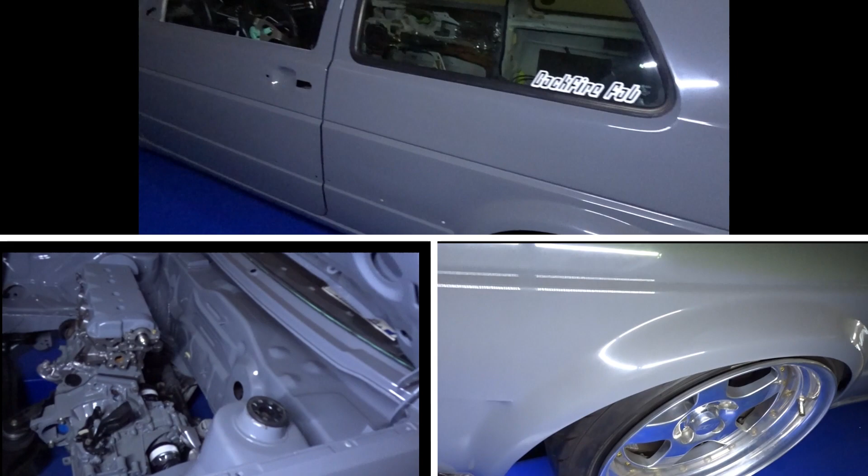Sorry for jumping into a new car, but this was my original mint green Performance VW magazine car. Now it's painted Nardo gray and is going to have an ABF 2-liter 16 valve with twin G60 superchargers.

Now back to the unboxing. Let's see what's inside this box that they sent - Elevel Plus height sensors. So this is what they give you for height sensors. They actually come in a pretty nice box.

So these are going to be the last thing that I put on. Once I get the car all running, I'll put the car on a lift and figure out how I'm going to run these. But they're actually super nice.

So this is the controller. Feel this thing, it's pretty beefy, all CNC'd. So this is the new solenoid they make, the VU4, all CNC'd, and they bolted it right onto the back of the case.

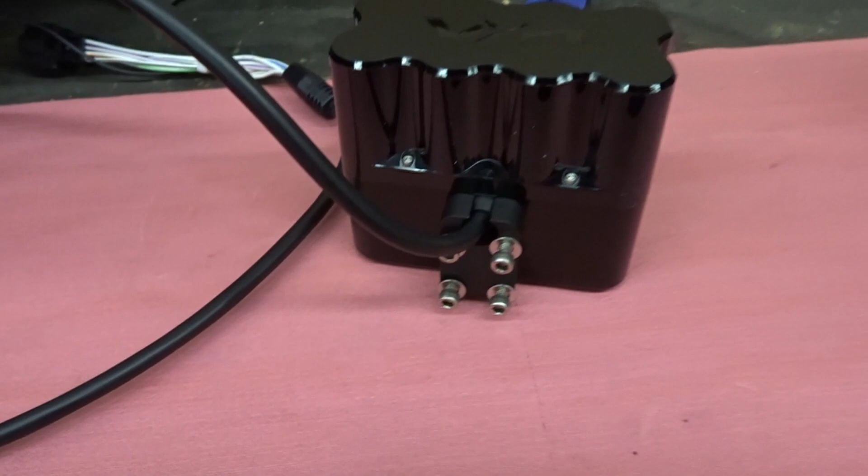So this is their new Elevel Plus with the small box. Let's take this out and take a look at it. And that's it, that's the whole controller - all waterproof, everything's built in. Solid state, done.

Wiring harness, and a pressure sensor.

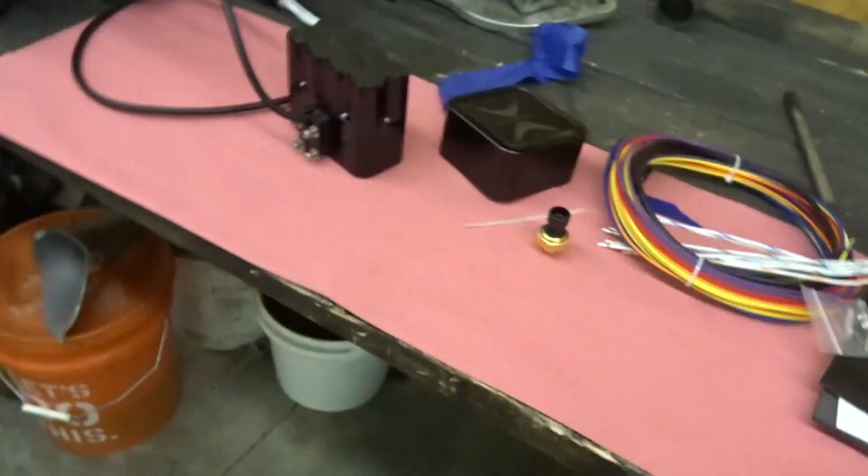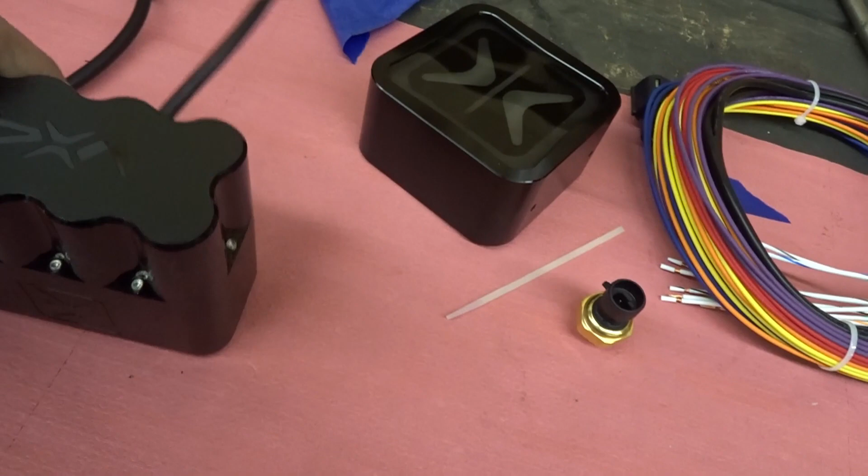So this is everything laid out. You got the height sensors, pressure sensor, your in-car keypad. I can also do it Bluetooth through my phone or an iPad. There's a control box, all the hookups, the manifold hookups, and these are the adjustments for speed of the air.

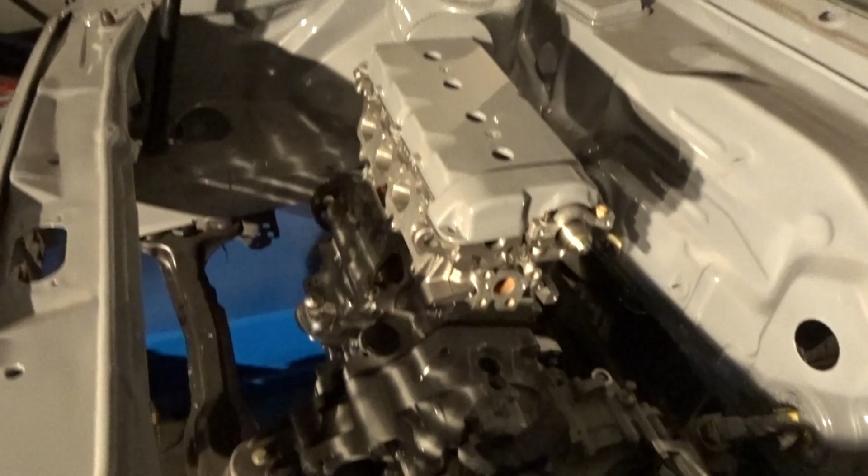So this is my car. I've been waiting to finish this thing until I got that air system because I didn't want to put it all back together and have to deal with taking it apart just for that. So I've been putting it off, and I finally got it - it's finally time to put this thing together.

This is the supercharger bracket I made that fits 2 superchargers on it. That round hump is where the alternator goes. This should be a fun project to get finished.

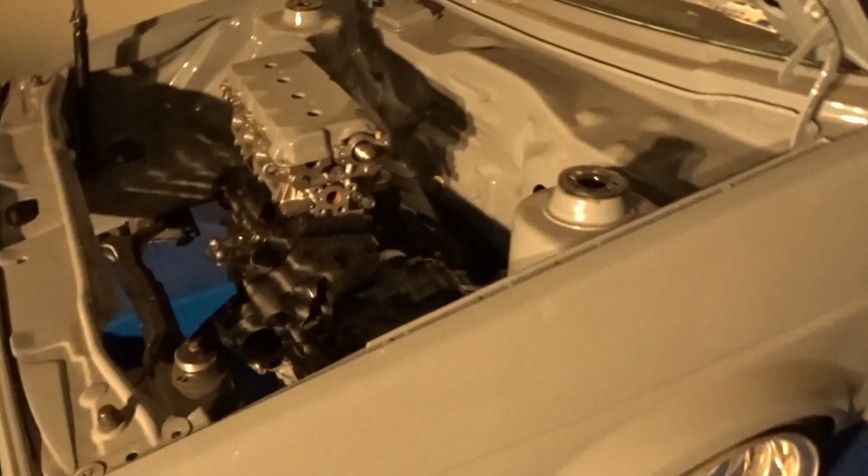The first thing we got to do is clear out the inside so we can put this thing together. I'm going to set this up, do a little time lapse, and get this thing cleared out. That is my old air ride stuff - when I get it out, I'll show you what it was.

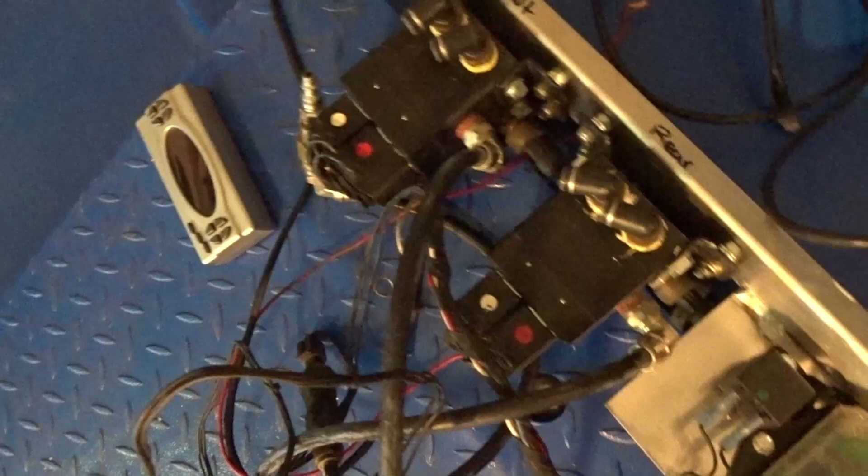Got our old management out. It's a V1 system. I had a V2 solenoid in here, but I went through 2 of them and had enough with it, so I switched to these old school valves, which I can't wait to get rid of.

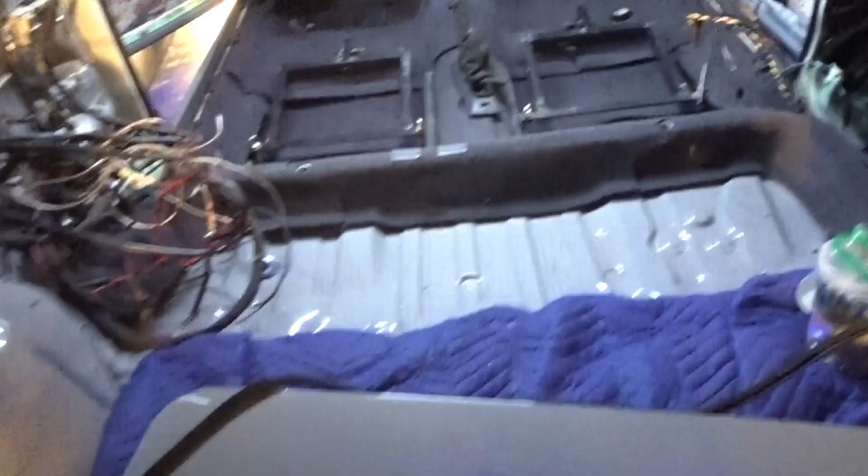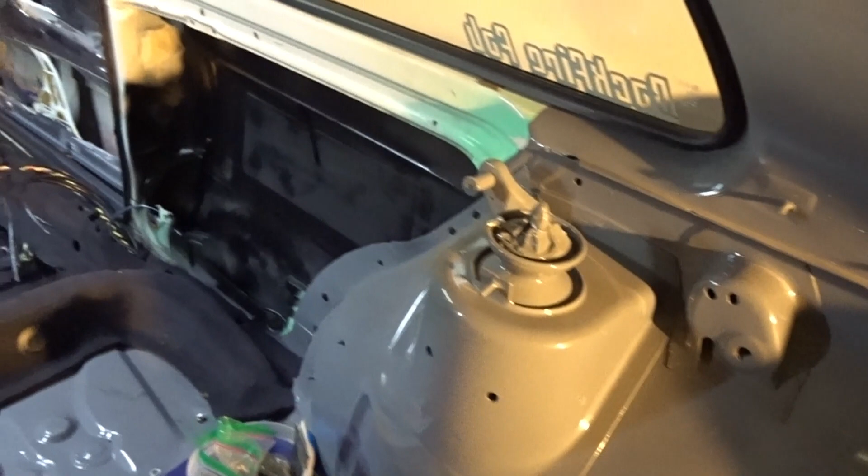So we got everything pretty much cleaned out that we need. This is the wiring to the rear that I have to take apart, clean up, and run to the back lights. We got the spot where the air ride is going to be mounted, and I'm going to start doing that - getting everything set up before I make a plate for it.

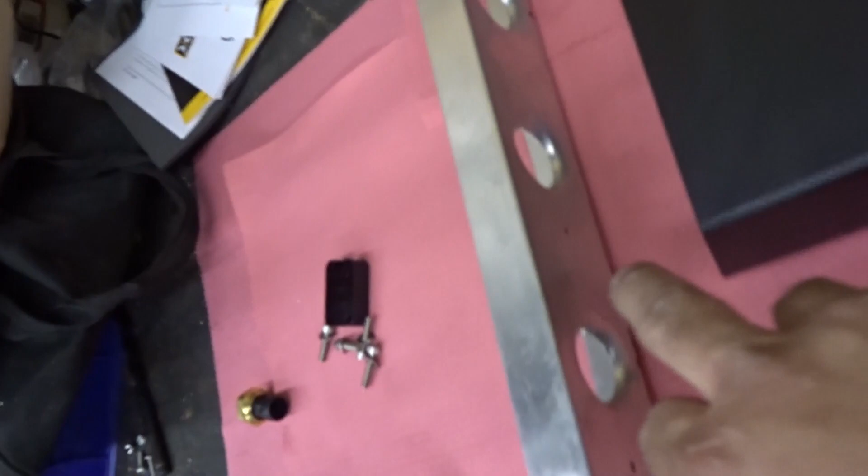So this was in the car before - it was a piece you could take in and out of the car. It used to have the battery right here, so I cut the battery tray out of it because the battery is going to be in back.

I switched to a little bit bigger of a battery because I was having problems once I started running a lot of boost with a small Honda-type battery being so far away that it wouldn't run correctly. So I went to a bigger battery - have that hidden in the back now.

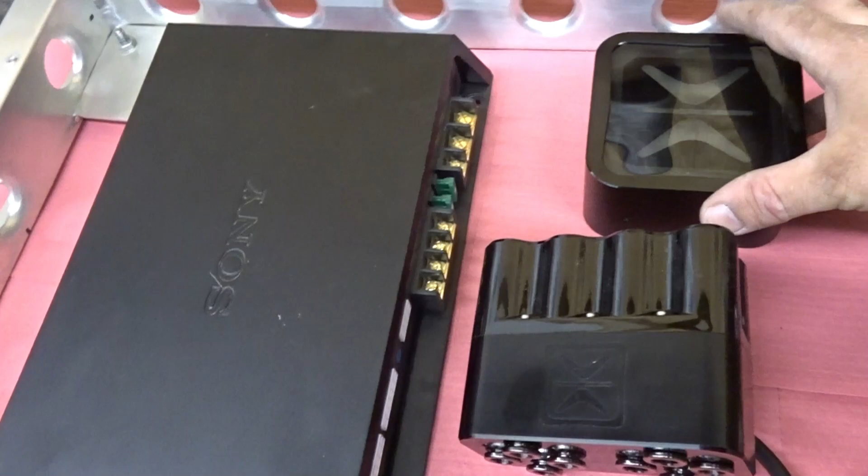I'm going to cut the plate out on my plasma table, weld it in, and bolt all this stuff up, then we'll be ready to rock with this thing and start putting it together. So we got everything marked out where I want it to be, and I'm going to draw it up real quick for the plasma table, then cut it out.

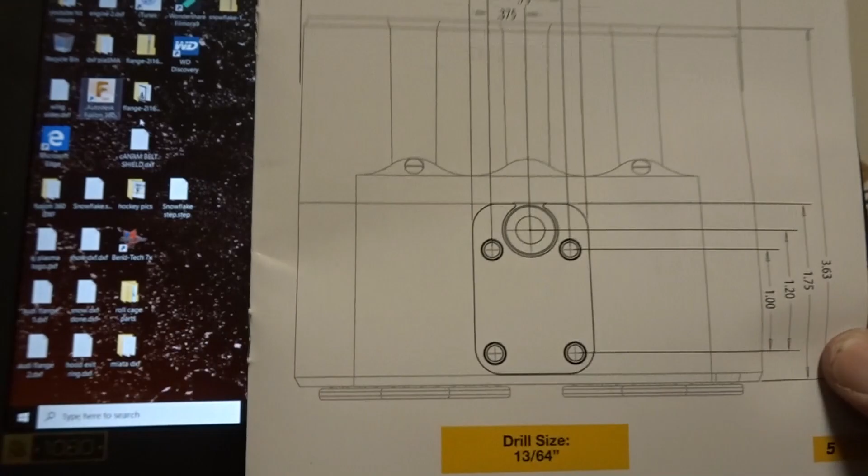Now we got the layout for that. We're going to go onto my computer and draw up the piece for the holder. Luckily Accuair made it easy because they give you all the drawings for each individual item, so it should be very quick, other than me having to measure the amp. I should be able to rock this thing out and get it inside the car real quick.

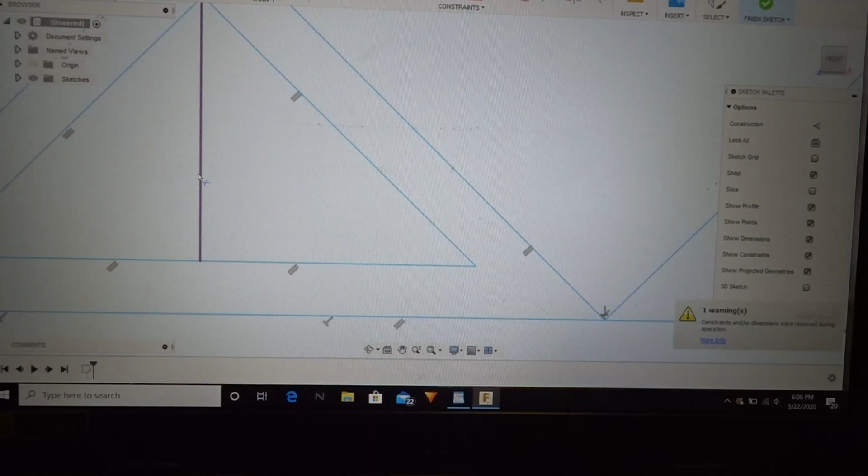So I got those all programmed up. I'm going to put them on the plasma and cut it out.

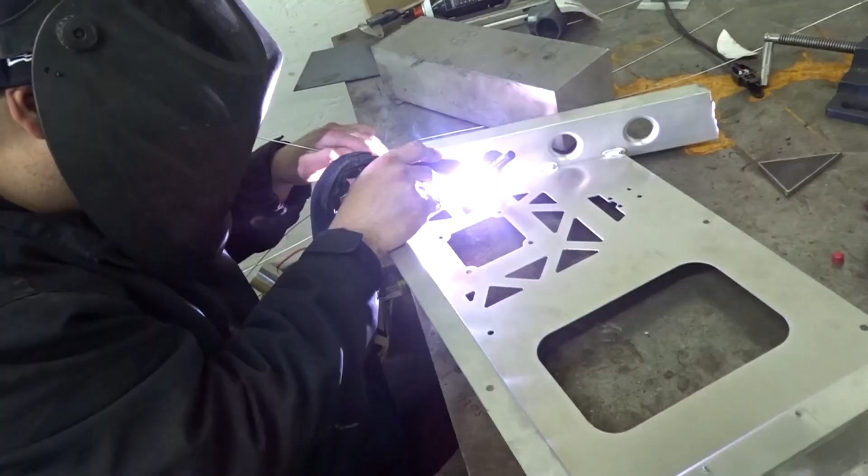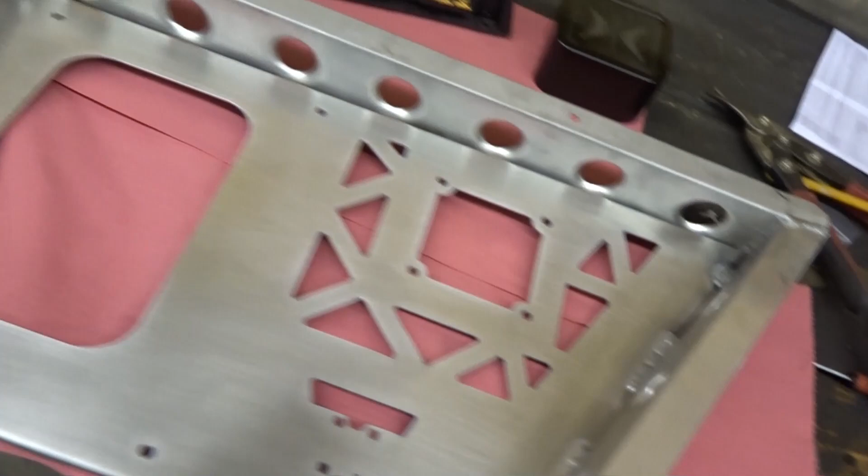So we got it done - don't laugh, you're stuffing your face, I'm hungry. So this is the piece, all cut out. It's all welded in. The only thing left, I'm going to bolt everything in, and I have to make a piece for the bottom. There used to be a piece that went across here that bolted on the bottom, but I'm going to do that once it's in, and I want to make sure everything fits. So I'm going to put this thing together.

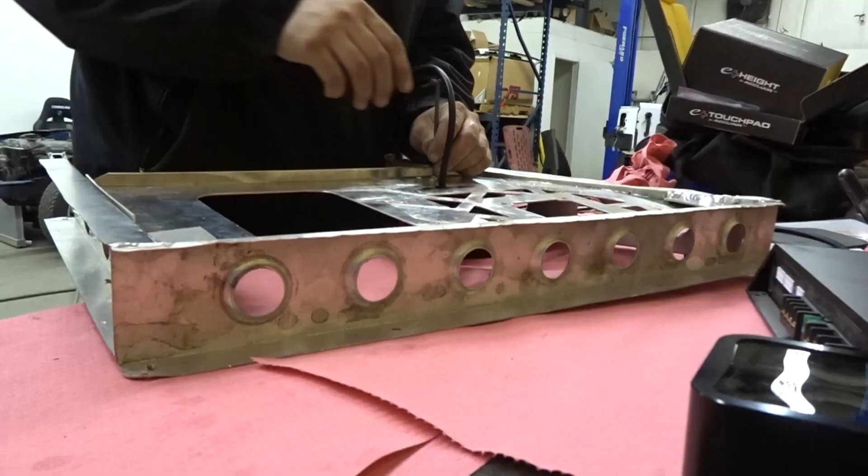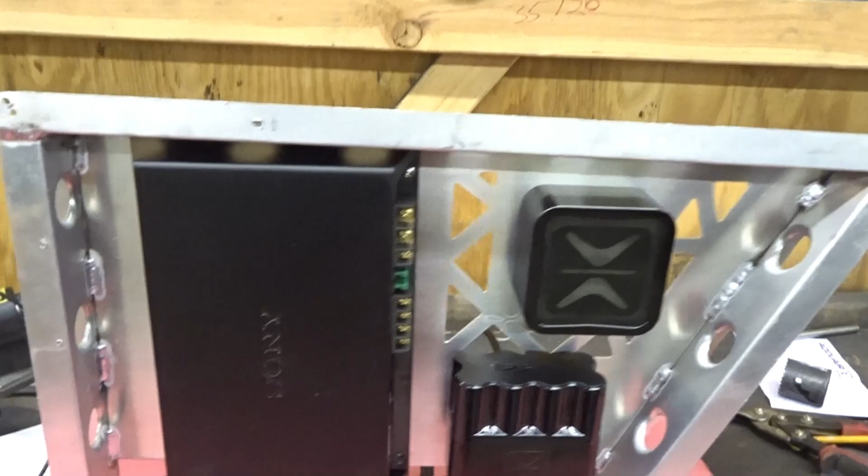Hey, so we got it all mounted. Tell me what you think. Not too shabby. What do you think? Quick and easy and looks really nice. He told me not bad for something you're not even going to see.